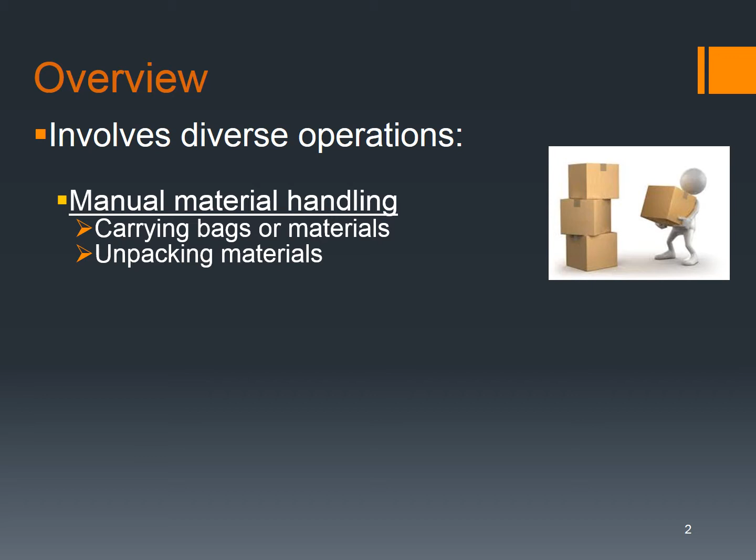Obviously, material handling involves a whole different type of operations. Not only is it manual material handling, which is carrying bags or materials and unpacking materials, the physical part of it with a person, but there's also material handling via machine. Now, this can be a lot of different things: forklift, crane, any type of rigging, anything like that. And then the last part of it is actually stacking or storing. This could be how you put all the boxes together, barrels, any type of lumber, bricks, any other material we're talking about here.

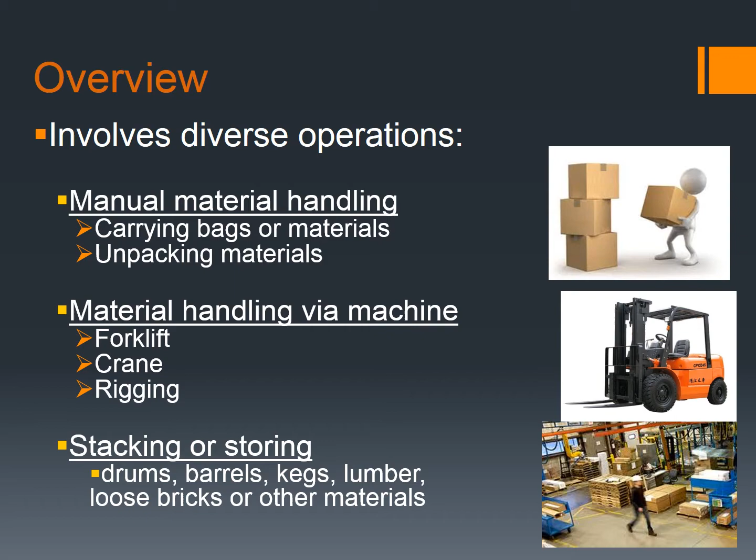Now, manual material handling, there's a lot of information out there about proper lifting and things like that, making sure that the signage is there. There is this NIOSH ergonomic guide for manual material handling that's pretty diverse. So if your company needs to make a manual material handling program, this would be a really good start, instead of trying to recreate the wheel.

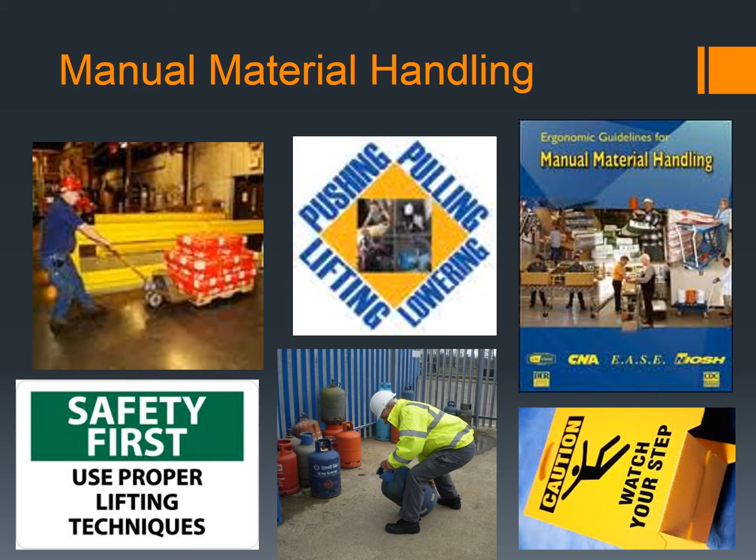So when we think about manual material handling, once again, think of the physical aspect of it, of a person actually pushing, pulling, lifting, lowering, raising, anything like that. And that's what manual material handling is.

So most injuries that occur from manual material handling have to do with back injuries. And there's several back injuries. It makes up about 20% of occupational illnesses when you look at the recording of this. And what normally happens is people trying to carry too much, possibly they have too much in their hands. They either fall, or they end up being crushed by something falling on top of them.

The reason why we're really worried about manual material handling and the injuries that occur because of this is because it does cost quite a bit of money. A back injury is going to cost a lot of money for a company, and when you look at how long it takes for a person to return to work after a major back injury, it's about 6 months, and after 6 months, only about 50% of employees actually return to work.

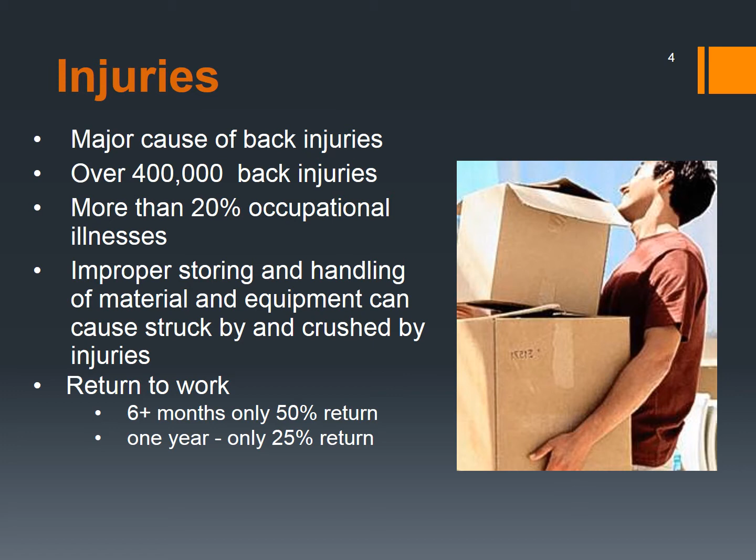And then after 1 year, only 25% return to work. So once again, you can see where we integrate a return-to-work program in trying to get people back to work. If not, you're going to lose some employees. As I said, it's a very, very expensive injury when it comes to it.

So some of the material handling hazards that we need to look at: improper lifting, or carrying things that are too heavy or awkward or too large for one person to carry. Then also being struck by materials or somehow being caught in pinch points. This is like two pieces of something coming together that pinch someone, and it can be your hand, your arm, just about anything. And then also being crushed by machines.

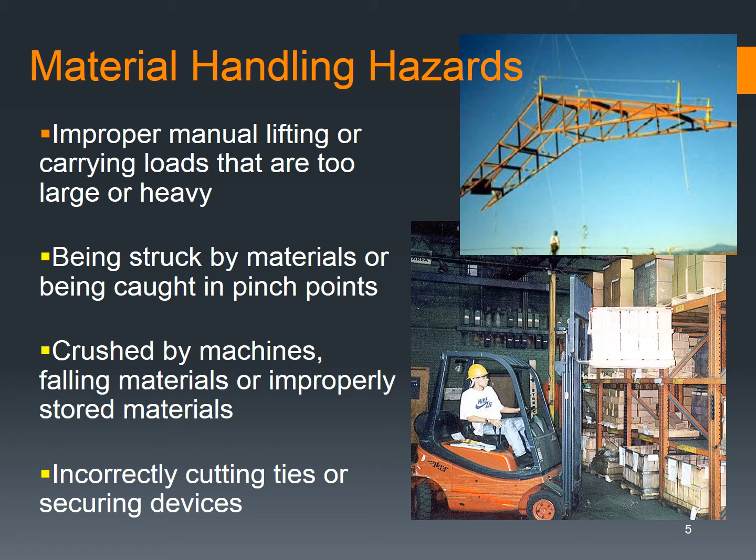This is where you start getting a little bit into forklifts, but these are material handlers, and something happens where maybe someone's struck by a forklift, which could be a major, major issue. Also, incorrectly cutting ties and the bands that go around any type of material to secure it so that it doesn't move -- a lot of times people are cut with that as well. So there's a lot of hazards with regard to material handling.

Now, when we start looking at it, this is a pretty good chart that I found, and typically in my other classes, I have people stand up and we talk a little bit about this. So you're just going to have to visualize, or you can do this since you're by yourself, hopefully.

But when you start looking at it, if you have to lift something, you have a normal work zone, and this is going to be your waist to your shoulder. In that zone, especially when it's close to your body, you can lift pretty much the most that you can, because this is your normal work zone. When you start getting out a little further, within somewhat of an arm's reach or a shoulder reach, that's where you start lifting less. The further you get out, and the higher up or higher down you have to reach for things, the average person doesn't lift as much. So you can see here, the near zone is when you're really close to your body.

You can lift quite a bit, and then as you start getting out 7 inches and 12 inches, it goes down quite a bit, especially when you're having to do it above the shoulder or below the knee.

Now think about when you lift a large table or something like that. Typically, you're going to pull it to your waist, close to your body, so you can have some leverage against that. As you can see here, that's about 90 pounds. Your waist to your shoulder is going to be 70 pounds, as well as below the knee. But as you start getting up above your shoulders, you can't lift as much, and people don't tend to realize that.

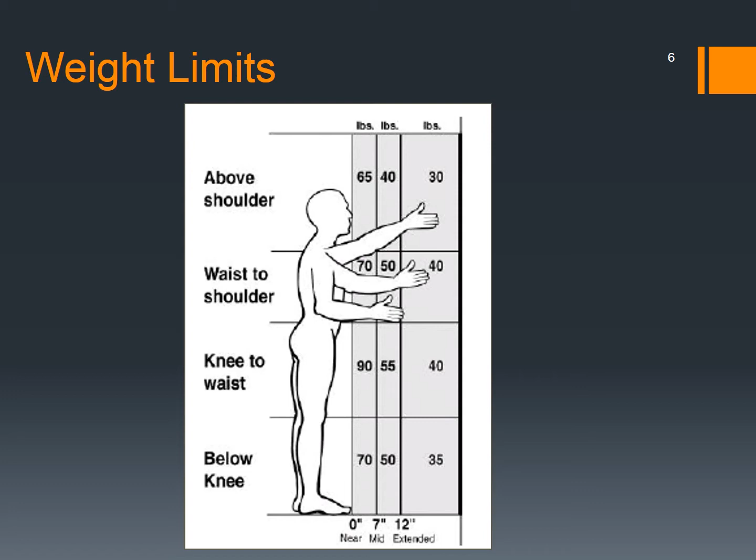So when we start talking about the amount of force that's on the lower back - and I couldn't find a really good picture of this - when you're standing just upright, you have about 80 pounds, for an average person, of weight or compression on your lower back.

Now, if you actually pick up something that only weighs about 20 pounds, and you hold it 10 inches away from your lower back, about the length of your arms, with your shoulders bent at 90 degrees, it ends up being 170 pounds of compression. And if you lift it out further, say your arms are straight, about 20 inches out, that 20 pounds of weight actually has about 260 pounds of force on your back.

Now when you bend over, this is where your center of gravity is off. So if you're at 20 inches with a 20-pound piece of something, it's going to have a compressive force of 635 pounds. And if you have even just 1 pound, it's 460 pounds of compressive force. So you can see how that's really a big difference.

Even just bending and leaning forward and lifting 1 pound, it's 220 pounds of compressive force. So this is how people get injured, even though they might not be carrying something that's very large or very heavy, because of the amount of force that's on that person.

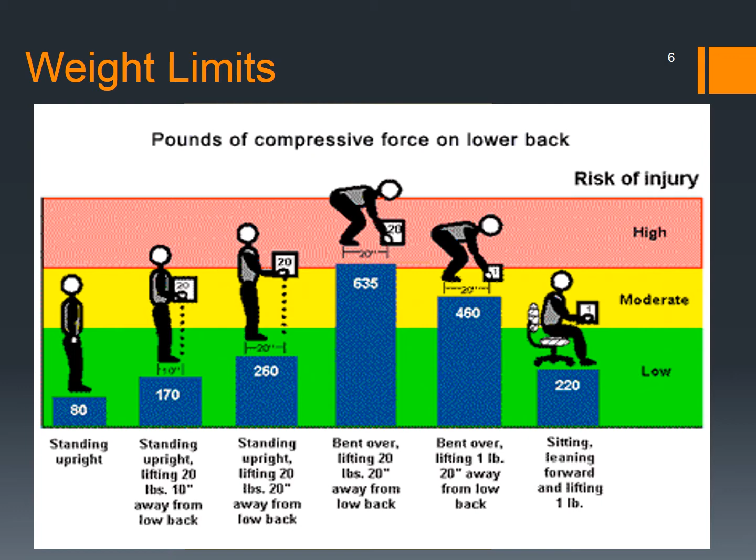Now, when you start looking at things to talk to employees about with regard to manual handling, obviously you want them to make sure that they have the proper grip on something and that they're able to lift it. So if it's too bulky or awkward, we need to look and see what we can do differently. When you can't see around the load, this is where a lot of the issues come from.

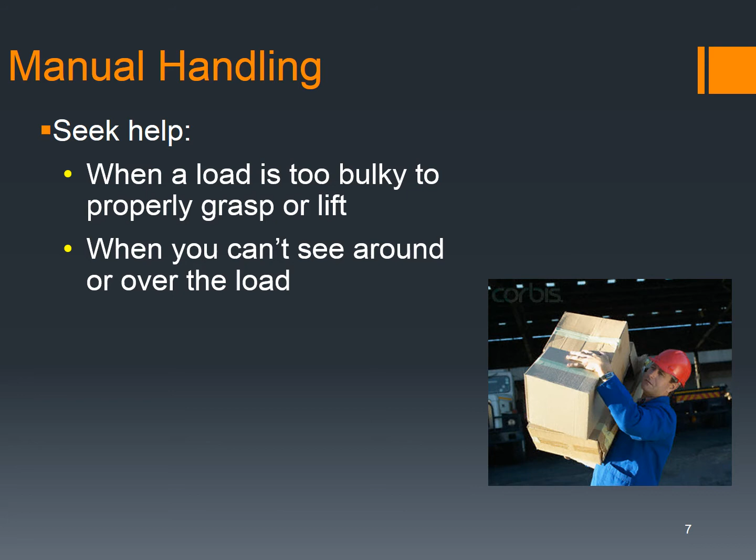Maybe it's too long or wide, and you can't see up over it. People end up not knowing where they're walking, and they trip and fall. When you can't handle some type of load safely, typically what happens is it falls down. And depending on what's in the boxes or containers you're actually carrying, obviously it's going to be some type of issue.

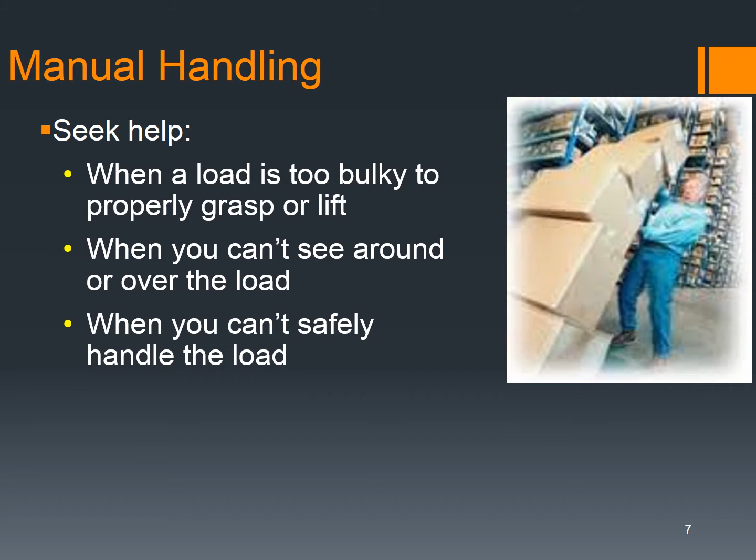What we found - and this is something we actually found at Blitz - was that we were having people carry boxes, and they didn't even have handles on them. At one point, they actually had a picnic table kit: probably a 3-foot by 3-foot box, about 12 inches wide. Inside, they had the pieces that you'd hook together, 2x4s, to make a picnic table - kind of an instantaneous picnic table, because everybody could take the 2x4s, put screws in them, and voila, you have this wonderful picnic table to enjoy outside.

Well, what was very interesting is we walked in there and they had this nice box, and the thing inside weighed probably about 30, 35, 40 pounds. And one of the things I noticed right off the bat is it didn't have any handles.

My suggestion to them was, if I were a consumer looking for something like this, and one box had handles versus another not having handles, I would probably pay a little extra for the box with handles, mainly because it's easier to load and unload.

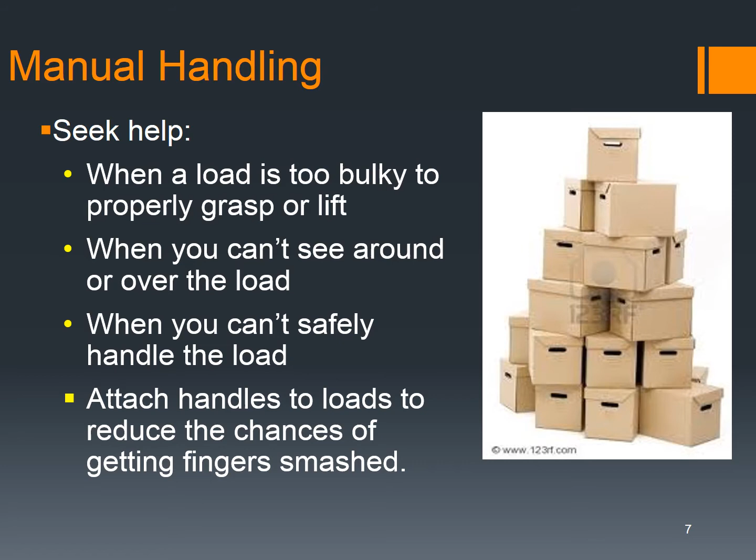You can see Target has done this as well. If you go in and get a big bulk of toilet paper, typically they'll put little lift pieces of tape on it so it's easier for people to lift, which makes consumers happy, and the people who lift this all the time are happier too.

There are a couple of books out there when you start looking at it. The first is the Revised NIOSH Lifting Equation, which is part of ergonomics, a class I'm actually teaching next semester. We go into material handling and the NIOSH Lifting Equation applications, figuring out measurements like elbow to wrist, and wrist to fingertips, for an average person, since all of us are made up differently. So how do you make this straight across the board where everybody can do something properly?

Well, the first thing you need is training. A lot of times people just bend right over. Showing them how to lift things safely and properly will definitely cause less stress on your body so you won't be strained. You also need to talk to them about proper use of equipment, and see if there's any correction or prevention with regard to potential hazards.

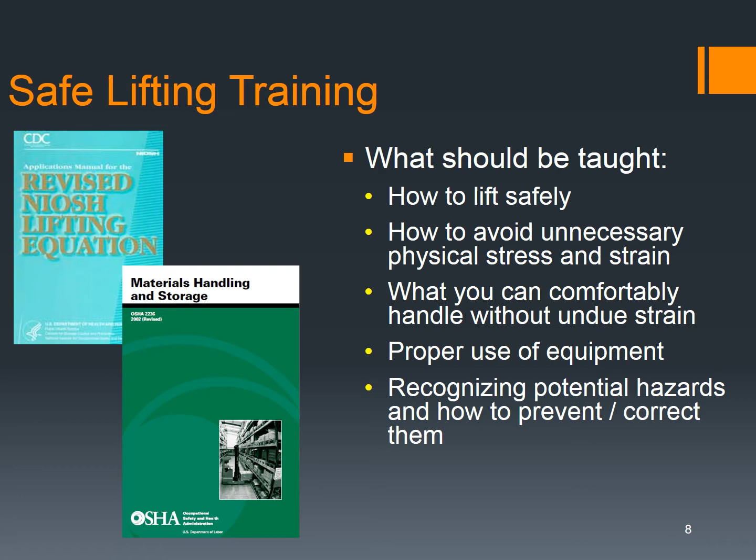So let's go through engineering controls first. As we've discussed previously, this takes the hazard out of the equation, so the employee never even gets up to the actual hazard itself, they never see it. So let's look at workstation design.

I'll have some examples and draw on the board, but a person can change something very simply and make things more convenient. If you have people reaching all the time, or lifting things up and around, it causes strain and stress. So using a conveyor or a U-shaped workstation where the person has everything right there makes it quite a bit easier.

Any type of lifting systems like hoists, vacuum lifts, or articulating arms fall into play and cause less stress on the employee's body. Sometimes you have to go with a redesign, whether it's carts, making them higher, or other equipment. A lot of times that's more expensive, but companies need to look at that and see what would be easiest for the employee.

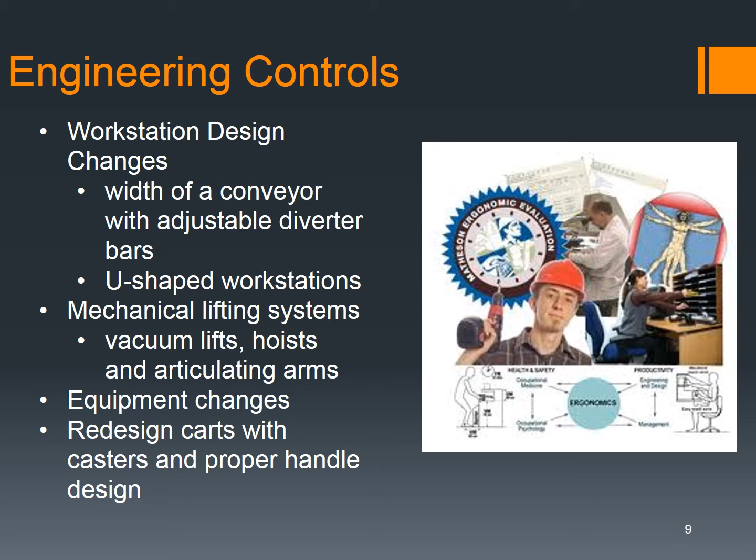When you look at administrative controls, this is the second level, so if you can't achieve it through engineering controls, you move on to administrative controls. This is where you can give people a break, whether through job rotation, where one employee works for 2 hours, then another comes and works for 2 hours, rotating the job out. Or it can be as simple as rest breaks, giving people time to rest between hard manual labor.

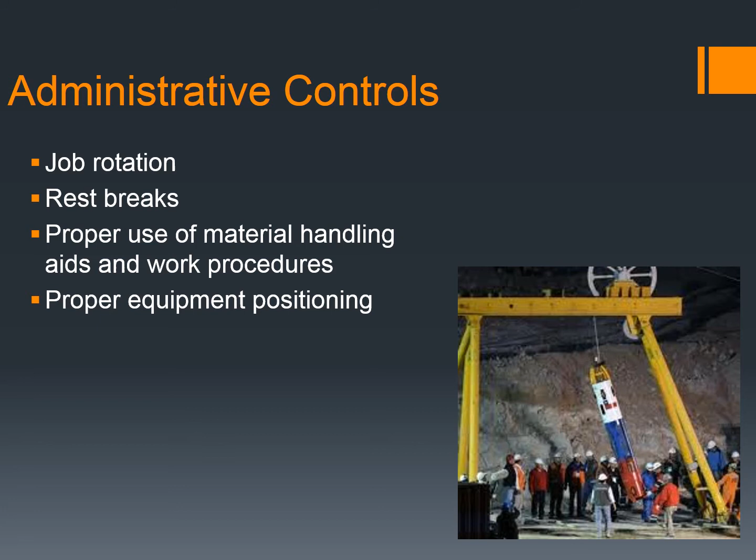Training would fall under here too, including training them how to use material handling aids properly, what the procedures are, and making sure equipment is positioned properly so it helps rather than hinders what they're trying to do. It takes about 21 days for someone to develop a new habit, so going over it again and again, walking around and positively reinforcing it, will definitely help employees remember and continue to do it.

So then the last thing is personal protective equipment, or PPE. One of the things you can do is gloves. Some gloves have grips on them, making things easier to handle. You see leather gloves quite often, or Kevlar gloves with regard to sharp edges, so that people aren't getting cut, and those will help out as well.

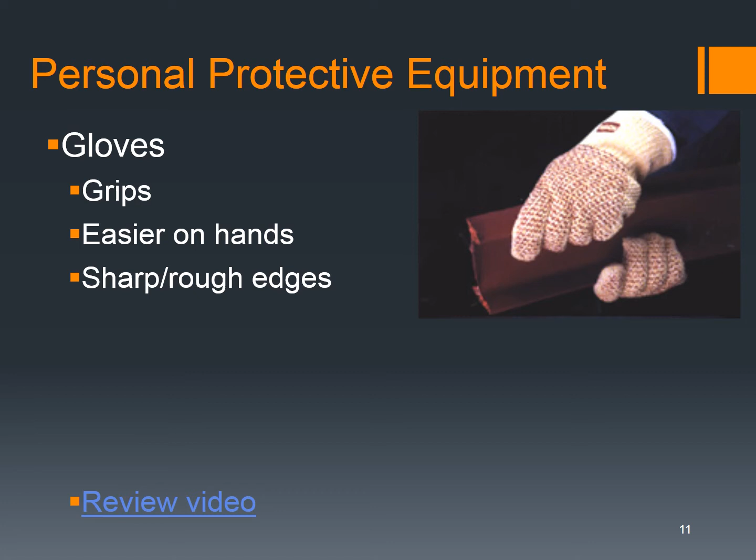Shoes - when you start looking at shoes, obviously steel-toed boots will help from anything dropping on them. Metatarsal guards will help protect the foot and keep it intact, as well as slip-resistant shoes.

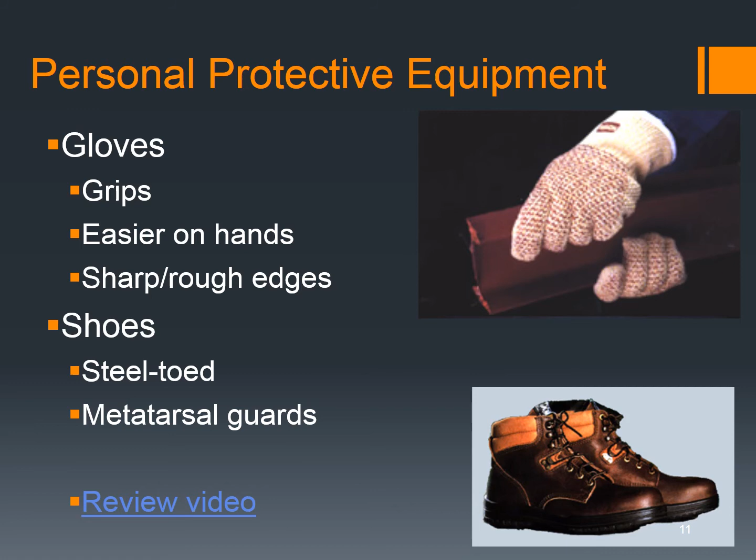Now the next part is material handling via machine, and this can be just about anything. It could be an overhead crane, a jib crane, a forklift, whatever. But this is what we're going to talk about next.

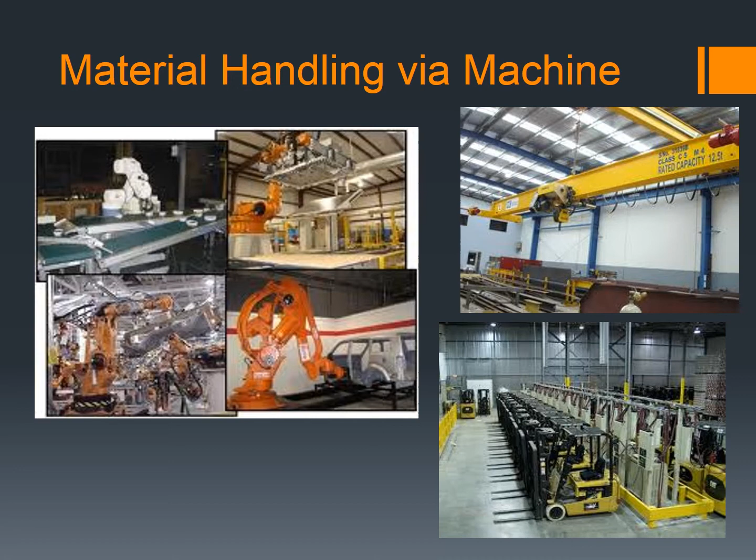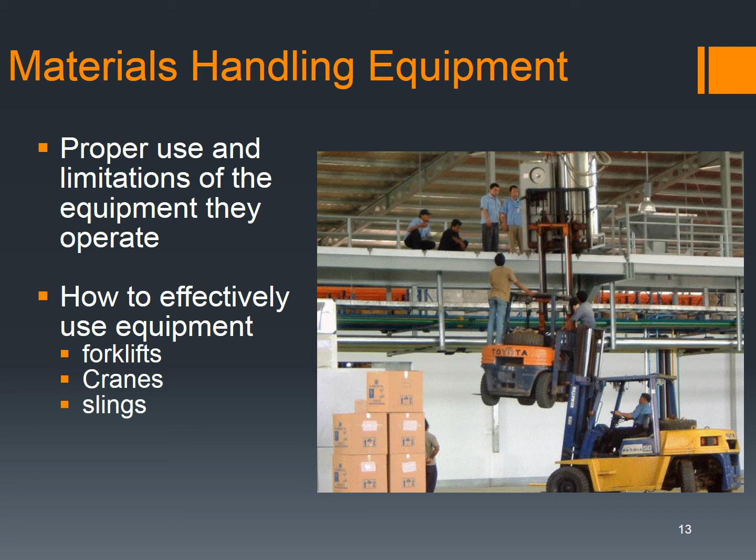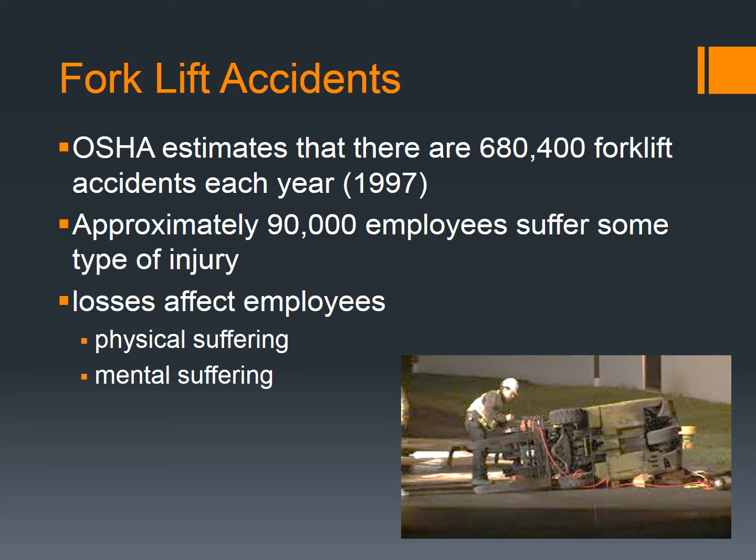Now, forklift accidents - when you look at them, OSHA in 1997, and this is a little dated but it's the last statistic I could find, showed over 680,000 forklift accidents per year. Of those, 90,000 employees operating them suffered some type of injury. This involves physical suffering, but also mental suffering, which is costly to the company as well as the employee. Out of that roughly 680,000, there were 100 deaths.

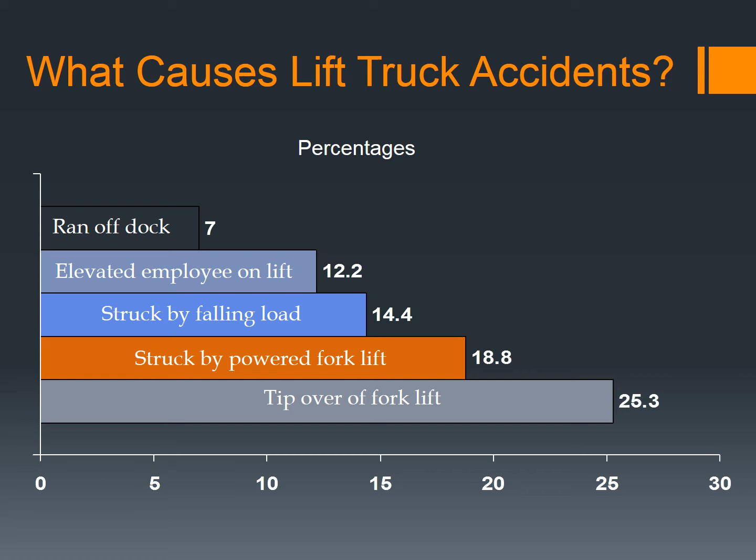The next cause is being struck by a powered forklift - someone walking or doing something nearby, and an arm swings around and hits them. Then struck by a falling load - this could be the operator or someone else, it doesn't specify. Also, lifting someone up on the forklift's lift part accounts for a notable percentage, and running off the dock is a pretty serious accident, accounting for 7%.

So when you have a forklift, it's kind of like driving a car, but your load is normally in front of you, and a lot of times you can't see around that load. Several forklift operators and companies I've seen drive backwards because the load's on the front, so you have to watch out for a lot of pedestrians walking by.

For some strange reason, a lot of employees think the forklift needs to get out of their way, which is kind of silly. A forklift actually weighs more than a pickup truck, so the driver has major blind spots and is carrying a load. You might have an over 5,000 pound forklift with a load on it, and it's not going to stop very quickly.

You really need to make sure that you're training employees or pedestrians who are around these forklifts to actually watch out for them, as well as the forklift drivers watching out for the pedestrians.

Obviously, blind spots are an issue. It's kind of like a car, if you haven't driven a forklift, but there are tons of blind spots on a forklift.

Driving indoors and outdoors and having to adjust your eyes to weather conditions, things like that, always cause some issues. Narrow aisles too, and you'll see a video at the very end where some narrow aisles really caught some people in compromised positions.

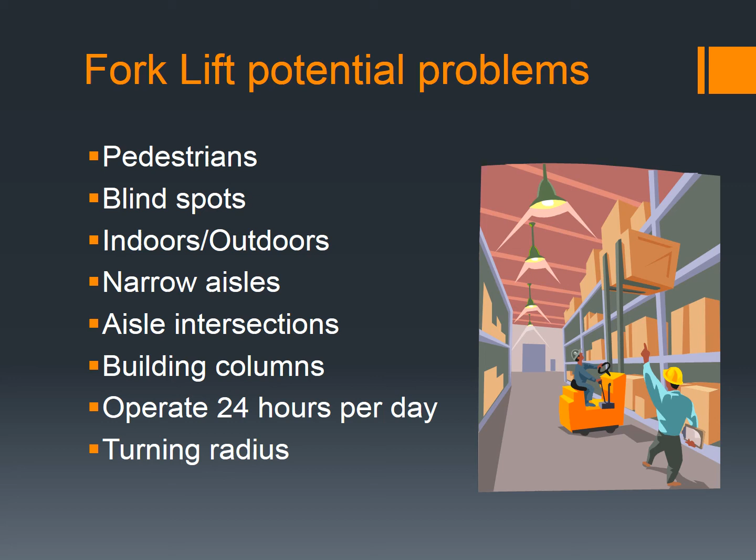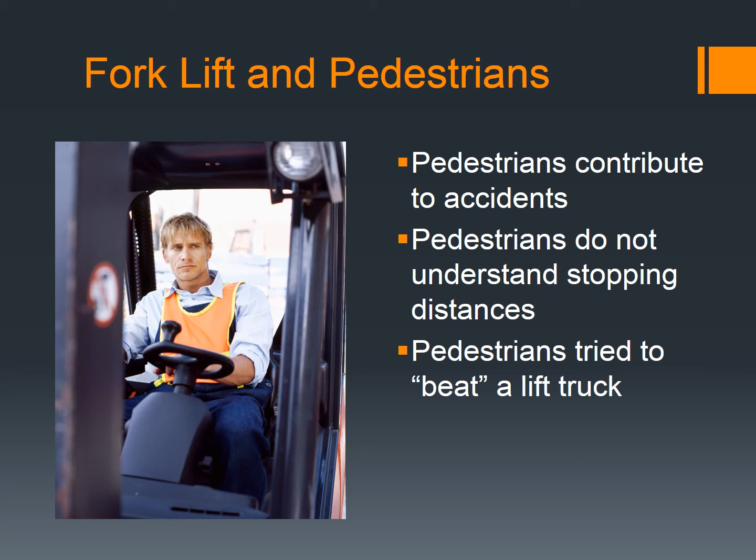When you look at pedestrians, they contribute to a lot of accidents because they don't understand stopping distances, and they try to beat the truck. It's kind of like trying to walk out in front of your local Walmart store and trying to beat a car that's not slowing down. This causes quite a bit of accidents in the workplace.

So how do you actually reduce forklift accidents? The first is training of drivers, making sure they understand exactly how the vehicle operates and some of these factors.

The next is maintaining the equipment and making sure it's in proper working condition, that the brakes, tires, lights, horns, and everything else are working properly. And then the last thing is to designate specific areas of operation, so employees know exactly where they are and are not to operate.

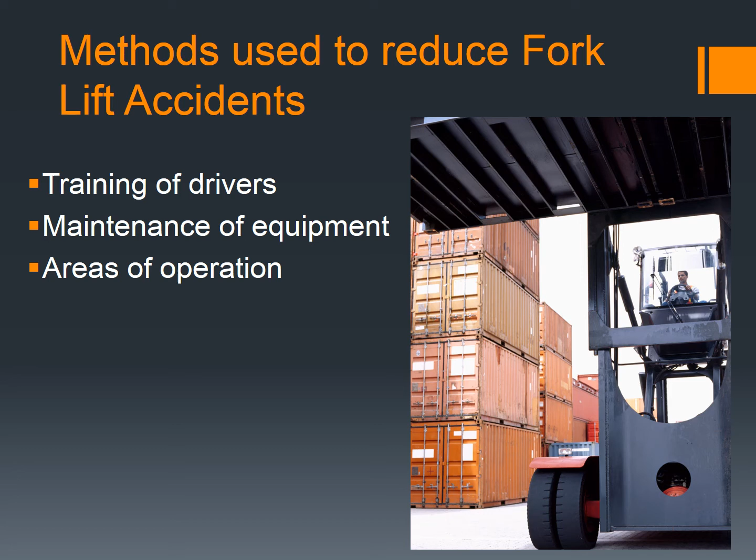With powered industrial truck training, there's a lot of things you go through. You're going to talk to them specifically about the forklift, and then also the workplace, making sure they understand those topics related to both.

There are standard requirements with regard to powered industrial truck or forklift training. Trainees must be supervised by a competent person, with formal instruction where you're sitting in a classroom getting face-to-face time, and then practical training where you go out and actually try to drive the forklift itself.

Someone will evaluate you on both the formal instruction and the practical training. This needs to be documented, and you need to keep track of it. OSHA has a 3-year requirement on this, so every 3 years you have to retrain employees on powered industrial trucks, and they will come in and ask for the training records to make sure that's correct.

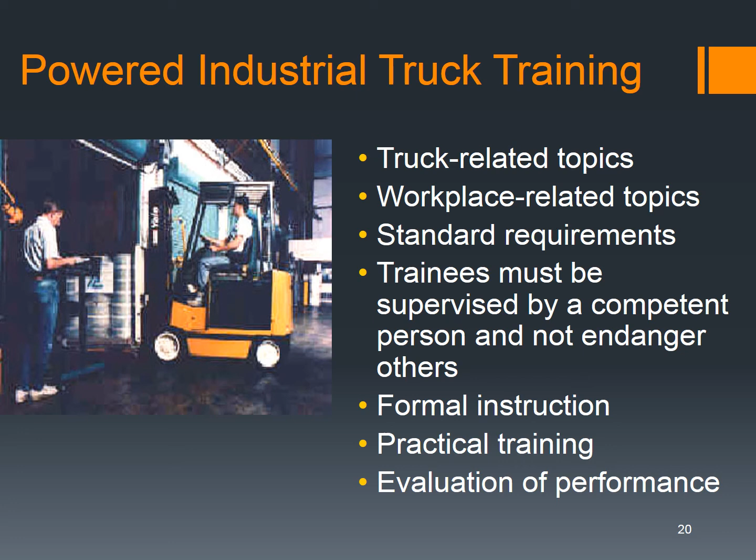Also, the powered industrial truck or forklift license needs to be on the employee at all times, especially if they're operating the vehicle, because if OSHA comes in, they'll ask to see their license with regard to training on the vehicle.

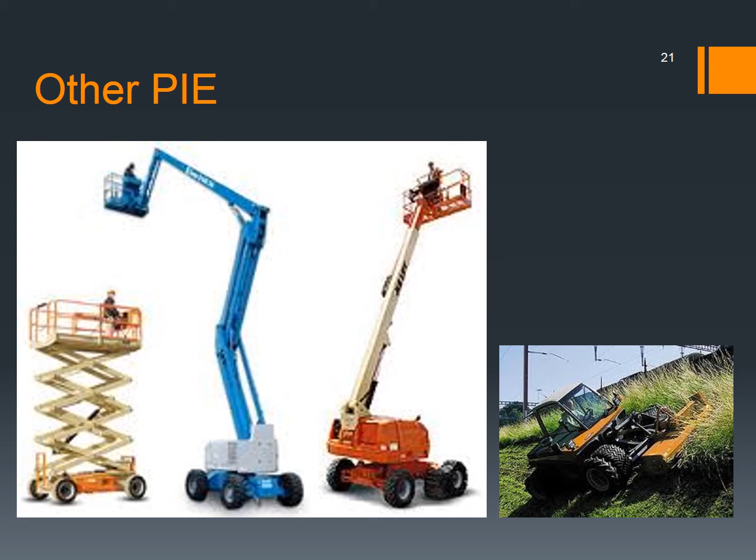Another thing that would fall under that is cranes, which can be an overhead crane or a gantry crane. The overhead crane is going to be on some four poles, and it rolls back and forth, so it can lift quite a bit of weight. Typically when put in, they're very costly, and they dig down deep with piers to hold these cranes because they weigh so much. You can lift quite a bit with those, but only in a very limited area.

The other type of crane is a gantry crane, which you see on TV quite often, or at construction sites lifting heavy objects. Some are portable, and some are built at the scene. Lately you've seen quite a few accidents with these cranes in work situations, especially construction, of them collapsing and causing quite a bit of issues.

Now, these are some of the things you have to be trained on with regard to crane safety: knowing how to assemble and disassemble the crane, power line safety, which is important not just in crane safety but in any PIE training, inspections with regard to ropes or safety devices, authority to stop operation, specific signals used in crane safety, fall protection, and getting qualifications and certifications for your operators and spotters.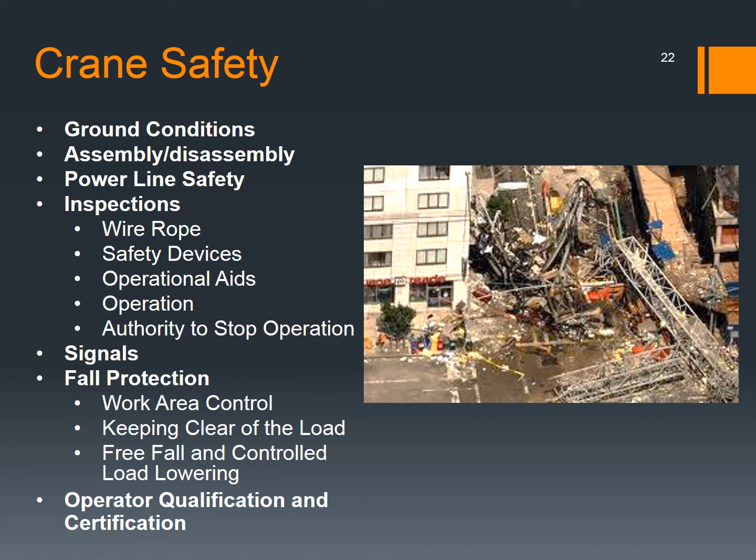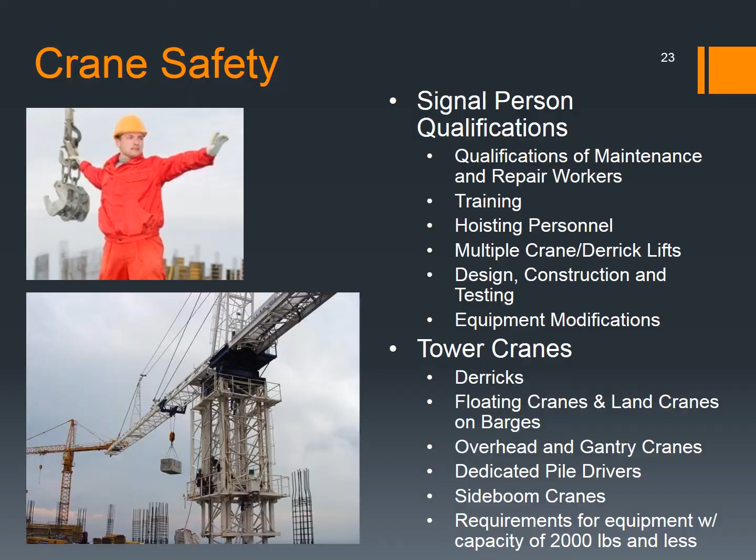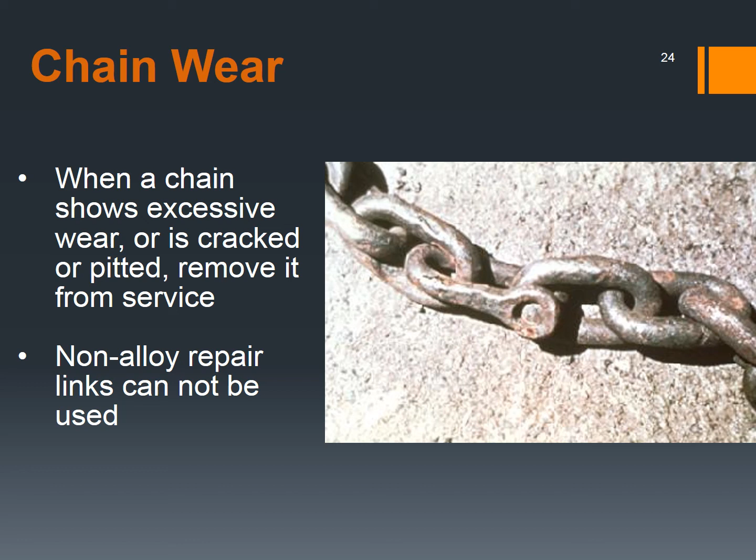A hose would do the same thing, like a water hose might do the same thing where it kinks up and has some issues. And then any type of crushing to where you can see a visible difference in the width of the rope sling - those are some things you need to look out for and remove them from service as soon as possible.

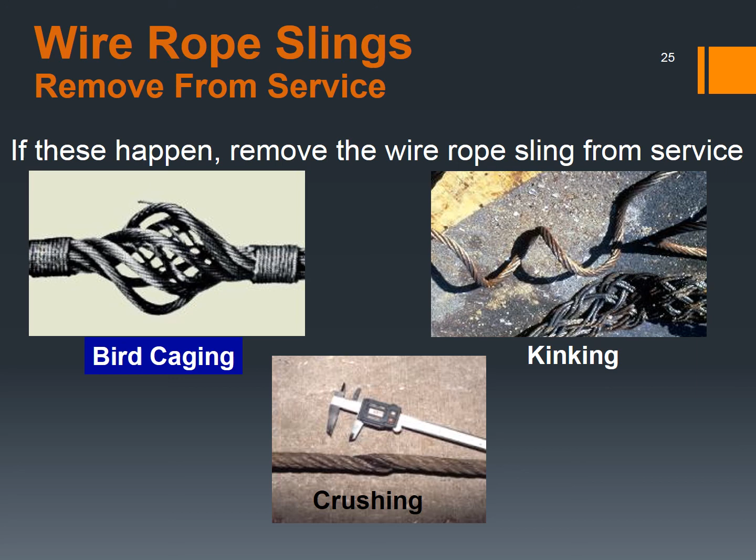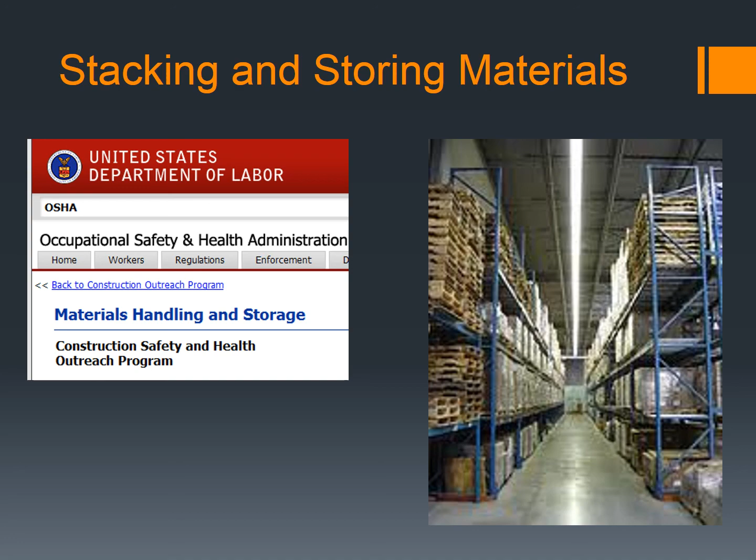Okay, other safety related material handling items to look at: stacking and storing materials. OSHA has pretty good information on material handling. As I told you previously, they have this on the construction side, but you can use this too. I think I've mentioned that you don't only fall under general industry - a lot of times you'll dip into other OSHA regulations, and this would be one of them because it talks about construction safety here, but you can also find information in general industry as well.

So storing materials, you have to make sure everything is secure. If you're stacking, racking, blocking, or any type of interlocking, make sure they're not going to fall on someone. This is where you start getting into load limits of floors, and also shelving, which isn't listed. You can see the sign here where it says this floor will safely sustain a load of 100 pounds per square foot - have an engineer or someone in your facility come through and check how much that's going to be. When it's a floor that's one thing, but when you start stacking things on shelving, it's very important so it doesn't become top heavy and fall over.

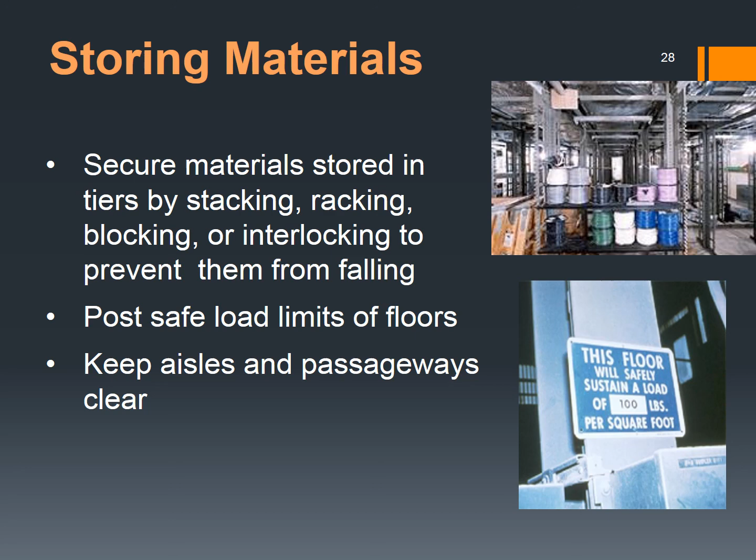The other thing is you need to have housekeeping issues taken care of here, and that's keeping aisles and any passageways free and clear from any type of hazards that might be there.

So let's get a little bit into fall protection, and I think Pat is going to talk about this, so I'm not going to talk too much about it. But really you're worried about a lot of different things - a lot of times people will go get their fall protection and it's kind of a general fall protection where anybody can use it, or sometimes you're assigned fall protection at your job, and this isn't just in construction. You do have to have fall protection on when you're in aerial lifts or scissor lifts or something like that.

So when you start thinking about it, employees grab fall protection gear and they don't think about how far that distance is. There are three or four different lengths when you look at it. If they actually free fall and it's going to be 6 foot - think a person's 6 foot tall - you have to put that into the distance. The total distance of the fall is going to be however much it is from that height to the floor or whatever's down below.

Now what happens is the person's 6 foot tall, maybe you've got a 6 foot fall protection, and what people don't add in there is that elongation. What happens is it actually elongates to prevent the shock of the fall, and it does cause some issues because people don't factor that in - they say, oh well, I'm 6 foot off the ground, I'll use a 6 foot fall protection, which isn't going to help because of that elongation. It's kind of easier to show when I'm face to face because I typically bring in fall protection so you can see what I'm talking about.

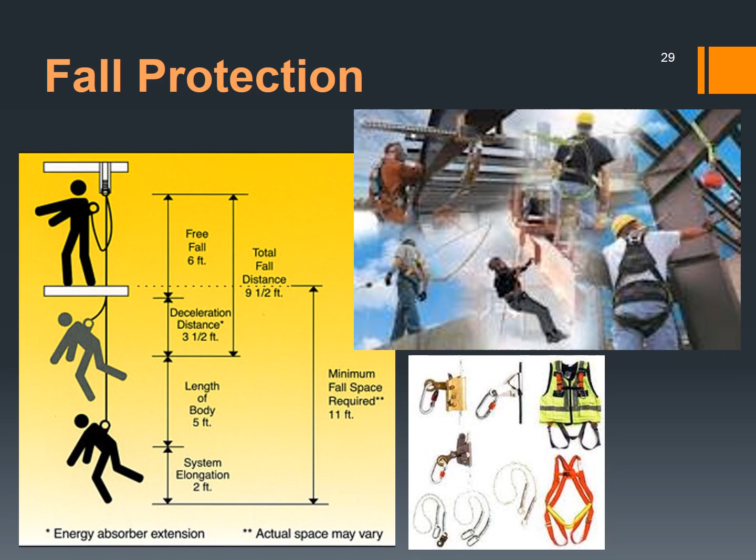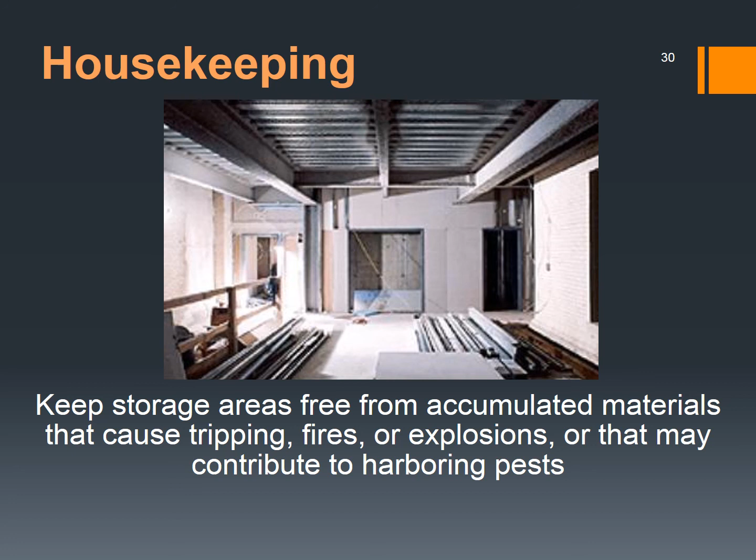Housekeeping, as I mentioned, is going to be a really big issue when having anything around forklifts or other storage areas, or just people walking and trying to lift these things. Because if things start accumulating in certain areas, obviously you get trip hazards, you could have fires - all of those types of things.